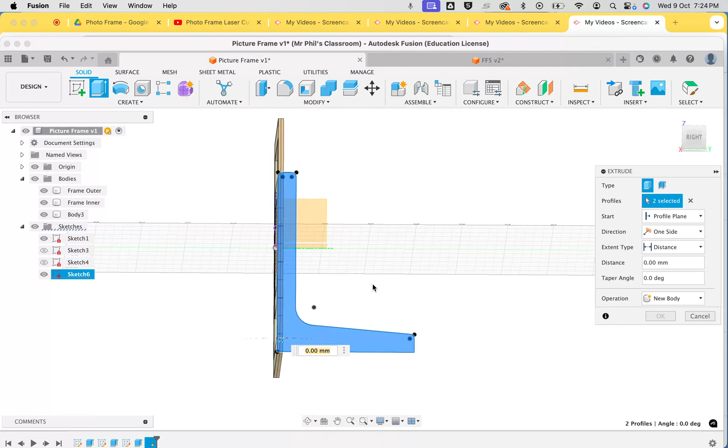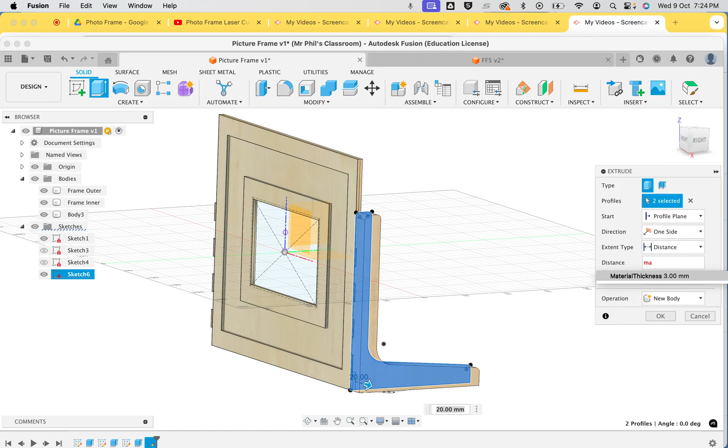There's an enclosed shape there I need to add to my extrude, and you can see that the positive direction is this way. So I want to, actually no, I do want it to go this way, come to think of it, because I drew on there. So I want it to be a new body, and I want the distance to be material thickness. And I'm going to click OK.

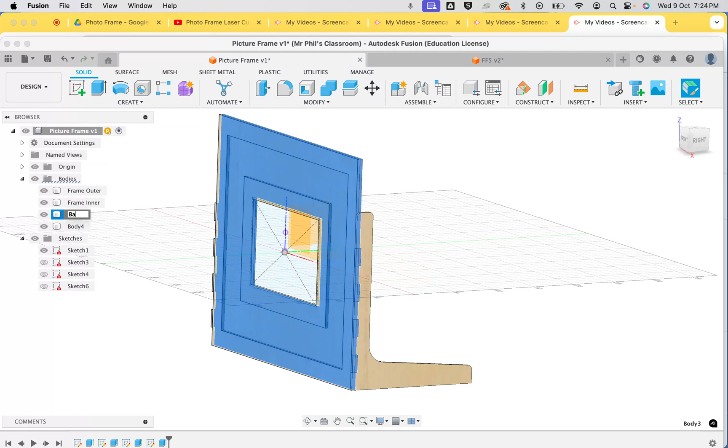So I've got a couple new bodies in here that I should probably do something with. So on the back here, I'm going to rename this back. I think I renamed it back in a previous tutorial, but I might have undone that at some point. And then I'm going to rename this stand right.

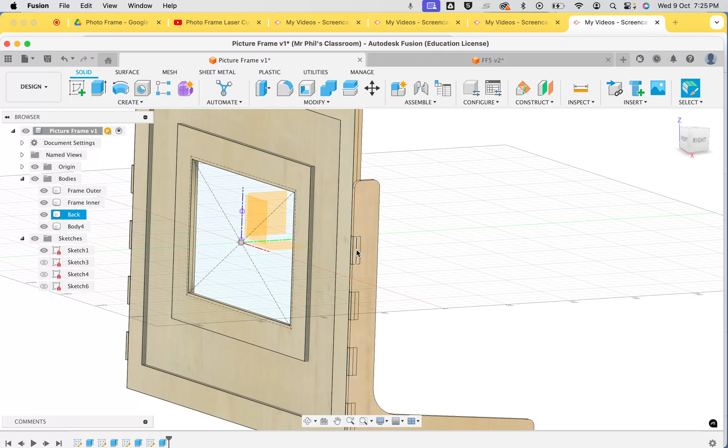Okay, so now what we have to do is we have to cut out holes in the stand so that the finger joints can go through. Now, one mistake I made was I didn't think this through. I actually need the finger joint to be in the middle of the stand. So that's okay. What I'm going to do is I'm going to use the move copy tool.

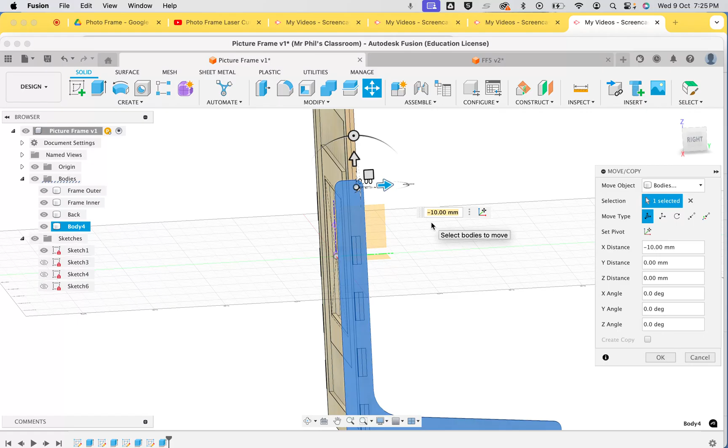I'm going to click on this, and I'm just going to move it over. So right now it's set to jump at 10 millimeter increments. And I can see when it goes in the direction I want, it's going minus. So I might just type -5. I think I wanted to go further than that. So I'm going to type -6, -7. That looks pretty good. So now I'm going to click OK. So now it is centered on the finger joints.

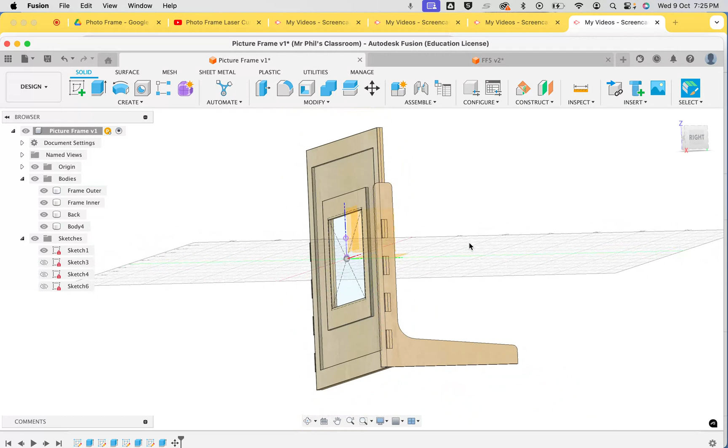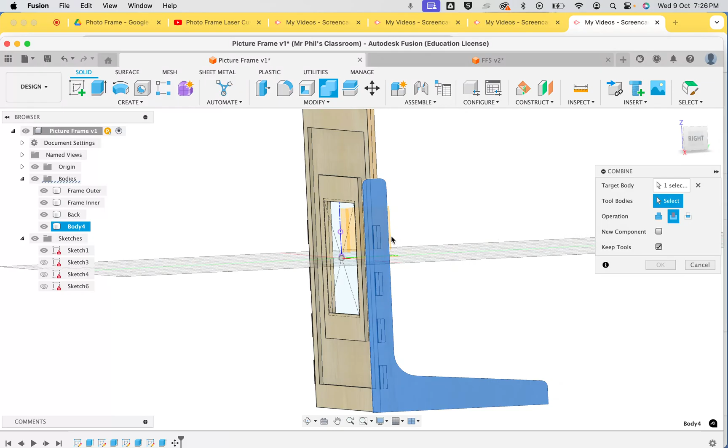So the next step is an interesting one. What I need to do is I need to combine these shapes to cut out the holes I want. So I'm going to click on combine. So the target body, that is what I want to cut the hole out of. So that is the side stand. The tool bodies are going to be this shape here and the back shape. Whoops, let's try this again. There we go, and the back shape.

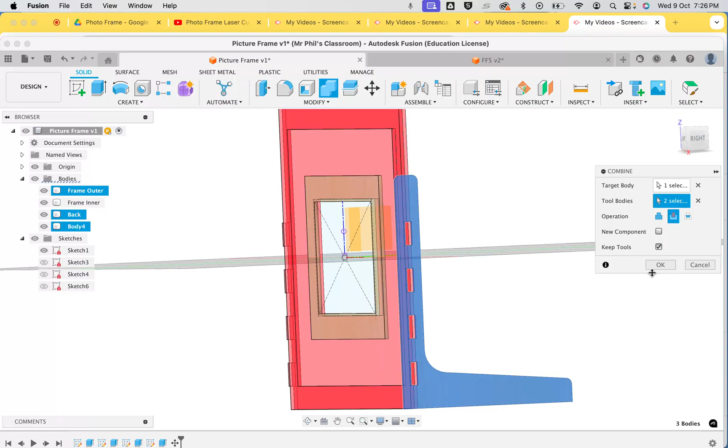So I can see here I've selected two tool bodies. It's automatically figured out that I want to cut a hole. And now this is really important. We have to make sure we click keep tools. And so then when I click OK, if I turn off the inner and outer frame, it will actually use the shape of the fingers to cut out exactly the size hole I need.

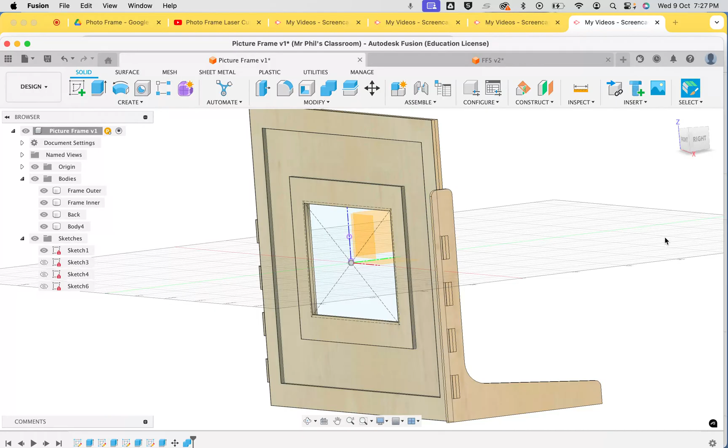So now that I've done that, I just need to mirror it to the other side, and I've got my two stands. So I'm going to go create mirror. Now here I can choose what I want to mirror. So I want to mirror bodies, and actually, funnily enough, it turned back into body 4. So let's call this stand right.

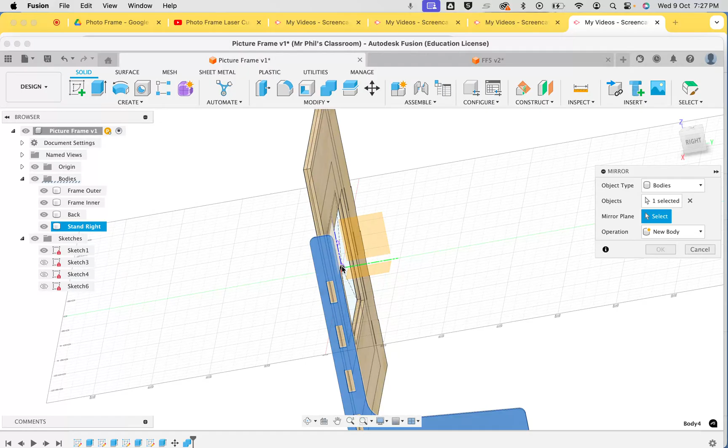So now I'm going to go create mirror. That's already selected. I'm going to select my mirror plane. And because I have centered my entire model on the origin, it's easy to select the mirror plane. And I make sure it says new body. And I have now made a new body, which I'm going to rename stand left. And there you go. You've got your two stands.